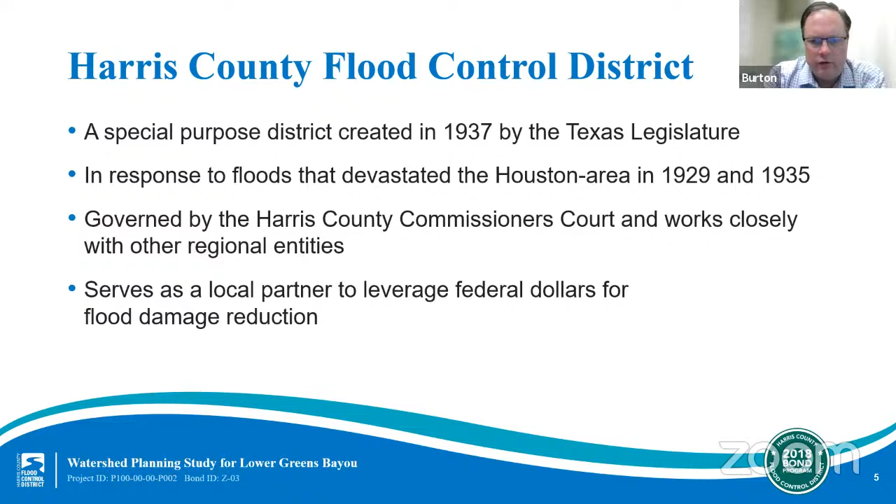The organization was created in part to serve as a local partner to leverage federal funding for flood damage reduction projects. Our mission has expanded since our founding, leading to billions of dollars in federal, state, and locally funded infrastructure projects in the ground. The mission of the Harris County Flood Control District is to provide flood damage reduction projects that work with appropriate regard for community and natural values.

One of the most difficult challenges we face is constructing effective projects that are sensitive to the community and natural values in a highly urbanized area.

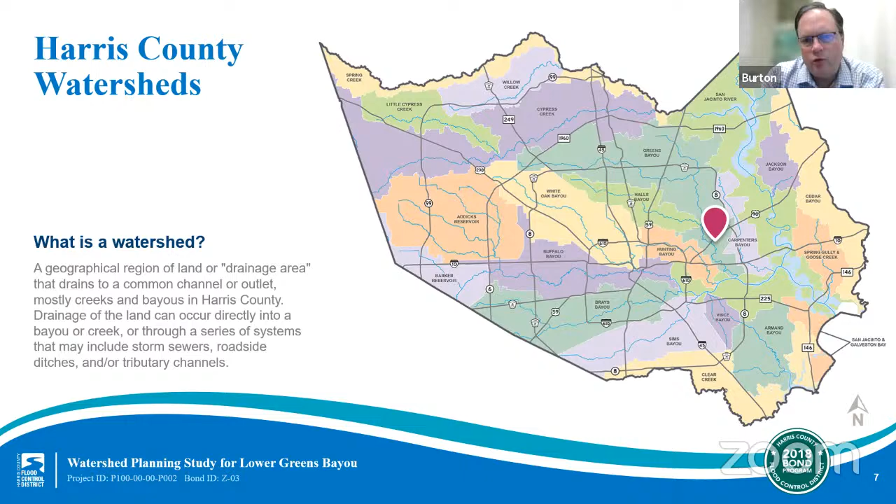Harris County includes 23 main watersheds totaling approximately 1,800 square miles with more than 2,500 miles of channel, roughly equivalent to the distance from New York to California. A watershed is a geographical region of land that drains to a common channel or outlet. Each watershed in Harris County has its own unique characteristics and needs. The project we are presenting tonight is in the Greens Bayou watershed, located in northeast Harris County.

Our area is naturally flood prone. Here are some of the reasons why. First, we are subject to extreme rainfall, often from tropical storms and hurricanes. Second, our landscape, as we all know, is very flat. And third, our native soils are heavy in clay, which impairs and limits their ability to soak up excess rainfall.

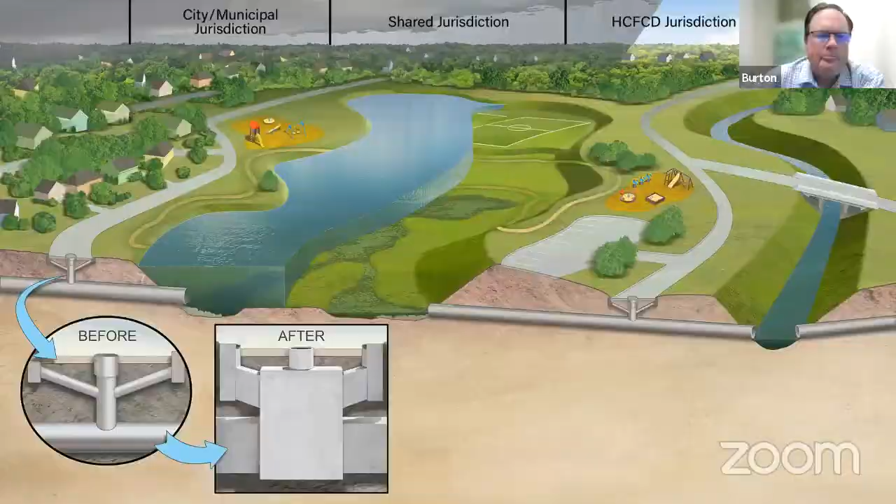On August 25, 2018, Harris County voters approved $2.5 billion in bonds for flood risk reduction projects. This vote followed a series of meetings across Harris County in each watershed, which resulted in a list of what is now 181 bond projects. As of August 25, 2021, every project included in the 2018 bond program has been initiated, including 11 projects in the Greens Bayou watershed.

A total of more than $1.35 billion in partnership funding has been secured so far to stretch the 2018 bond program even further. The actual timing of each individual project will depend on a variety of factors, including environmental permitting, right-of-way acquisition, and utility relocation, and in some cases, requirements of a particular grant. That said, project lists and projected schedules are updated regularly on our website.

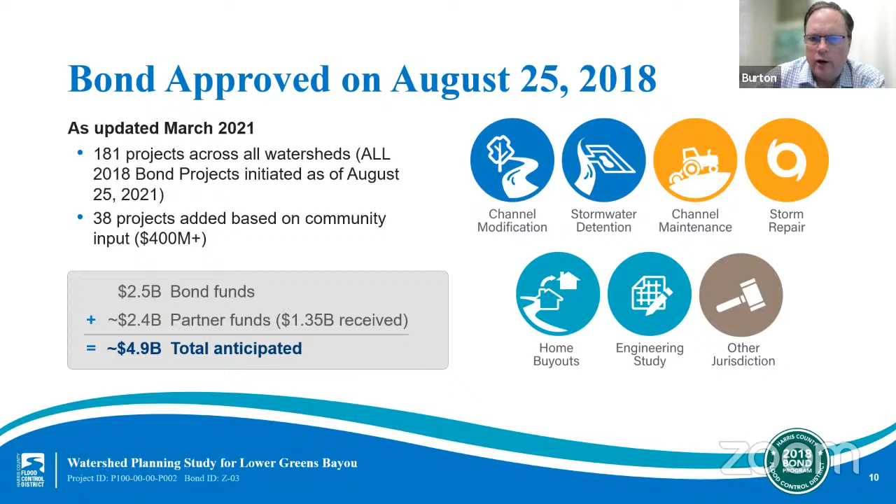While the bond was for $2.5 billion, the full cost of every project in the bond tables is almost $5 billion. So we made it clear from the outset that we would need funding partners to fully construct the projects in the bond program. And as I mentioned, we've had some success so far, having secured more than $1.35 billion in partner funds.

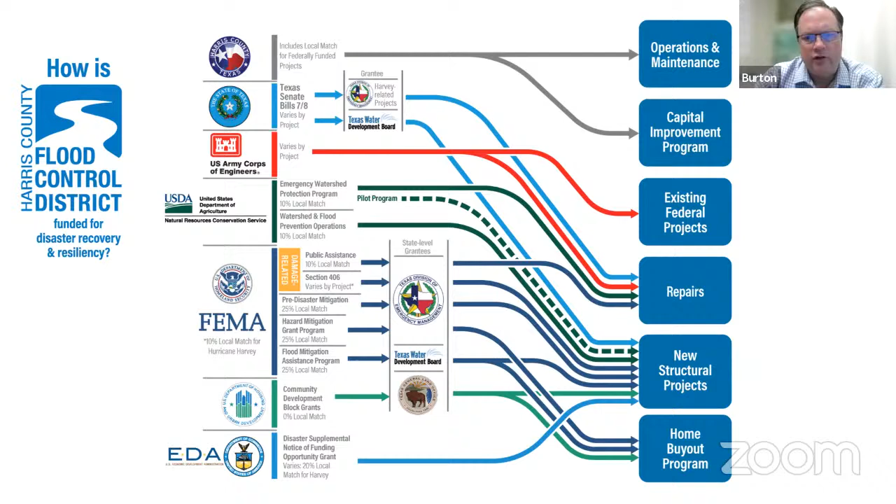As this graphic illustrates, there are many sources of partnership, including federal, state, and local funding that the Flood Control District is working to secure for Harris County. Each agency has its own definition of eligible projects and its own requirements for local match funding.

So the Flood Control District works diligently to match projects to the right partnership opportunities. Now that I've provided that background, I will move to the part of the program that is specific about the Greens Bayou watershed and the watershed planning study for Lower Greens Bayou.

Here we have a map of the entire Greens Bayou watershed. As I mentioned earlier, a watershed is defined as all of the area that contributes drainage to the main channel, which in this case is Greens Bayou. The upper reaches of Greens Bayou flow in an eastward direction, and then the lower reach flows south into the Houston Ship Channel. The watershed covers about 212 square miles, and there are about 308 miles of open streams, including the primary streams and tributary channels.

Flooding of homes and businesses along Greens Bayou and its tributaries has occurred numerous times in the last 30 years, with devastating flood levels throughout the watershed brought on by Tropical Storm Allison in 2001 and Hurricane Harvey in 2017.

Significant floodplains and high-density development have combined to cause high damages during even moderate flood events. This area was largely developed before our current understanding of flood mapping, meaning many structures were built within the current 100-year floodplain.

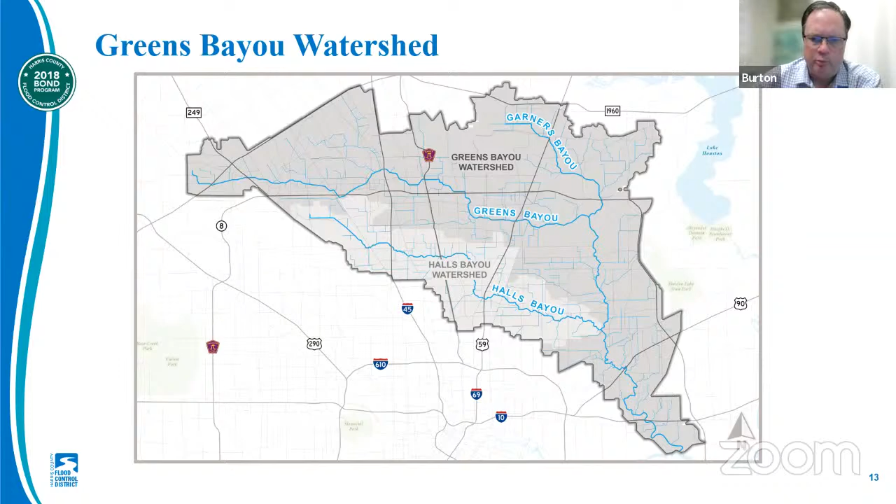Additionally, the lower 10 miles of the watershed, which is generally the portion downstream of US 90, are tidally influenced, meaning that water levels are also influenced by the elevation of water in the ship channel. As such, storm surges can impact flooding levels in this portion of our study area.

For the feasibility study, the final product is a report that summarizes the study and forwards recommendations around concepts that may need to move forward for additional consideration and refinement.

But we understand that many are not all that excited at the completion of just a study or report. However, this element is critical. There are limited dollars for flood risk reduction, and we want to be responsible stewards of taxpayer dollars. We want to ensure that we build the right projects and that we maximize the use of dollars spent. And we want to ensure that projects do not cause flooding somewhere else.

Additionally, the securing of funding assistance from others requires rigorous demonstration of project benefits and evaluation of environmental impacts. The feasibility study also informs the next steps, including the preliminary engineering process that will further refine the alternatives, including identifying needed rights of way, determining utility relocations, environmental permitting, and refined and detailed cost estimates.

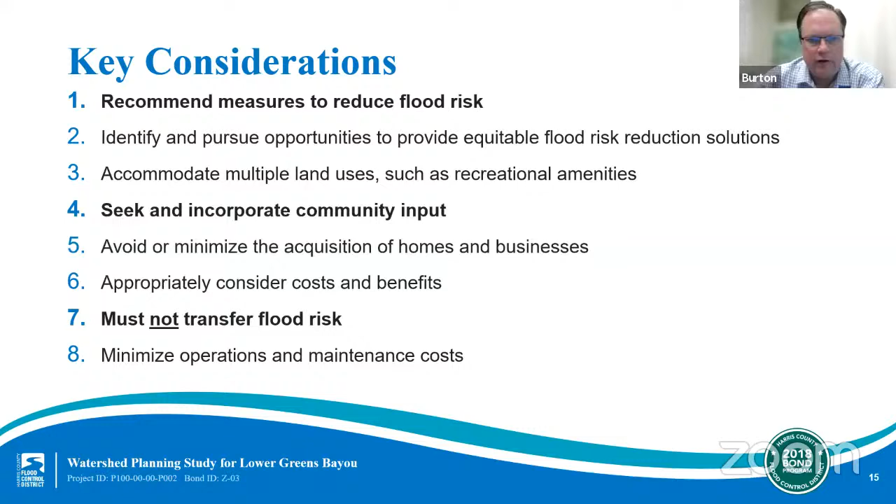You may have heard us talk about our flood mitigation toolbox. These are the various techniques we typically deploy to reduce flooding.

It is important to find the right type and right configuration for each project. Now I'll walk through them briefly to add some additional context.

First, channel modifications have long been used by the Flood Control District and other entities to reduce the risk of flooding. It's a broad category, from full rectification of a channel to providing some modification to the side slopes.

Stormwater detention, which I described earlier, is also a popular mitigation tool. The concept is simple: temporarily store floodwater to provide relief to the channels downstream. Stormwater detention is more cost-effective when the watershed is smaller. As the watershed gets larger, more storage volume is required to obtain the same benefit. That is why you will not typically see a stormwater detention basin along a large river, such as the San Jacinto River.

It is common to pair channel modifications in a reach with stormwater detention basins to mitigate increased flow. Less common tools include channel diversions and bridge adjustments. Diversions are only available when there is a location that you can divert the floodwater to that will not cause adverse impacts. Bridge adjustments and/or replacements can remove an impediment to flow, and they are also often implemented as part of a larger suite of initiatives.

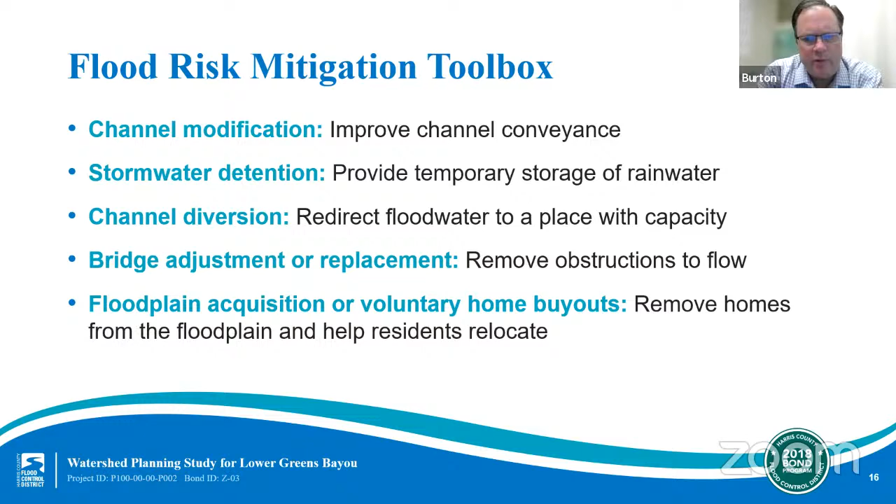A bridge replacement can also result in additional flow downstream, requiring it to be paired with a stormwater detention basin. Last is acquisition or buyouts in the floodplain, which is simply purchasing flood-prone properties and assisting the owners in relocating to a home on higher ground. It is not always the most popular option, but it is sometimes the best option, especially when there are safety hazards to residents and first responders.

There is no technical definition of Lower Greens Bayou. However, for this project, it is a portion of the Greens Bayou watershed downstream of this site. The study area includes the contributing watershed of Greens Bayou. Downstream of this point, there are a number of tributary channels that also drain to the bayou, and there are flooding issues along some of these channels as well. In total, the Lower Greens Bayou feasibility study area encompasses just over 42 square miles.

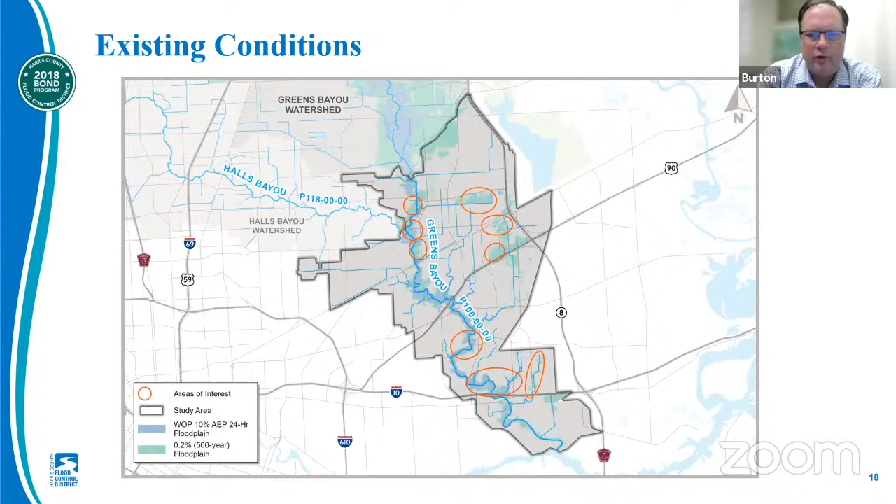These clusters help drive our formulation of potential flood mitigation concepts. And while we use this data as a baseline, we refine these areas in collaboration with the community to help us organize our approach.

Based on these areas of focus I just highlighted, you can see some overlap with locations of the flood risk mitigation concepts we explored during the study. All in all, we looked at 11 concepts in 10 locations to determine what projects or types of projects may be the most beneficial and feasible in the Lower Greens area. I'll talk more about the specific concepts we explored shortly.

While studying these flood risk mitigation concepts, we had to have an objective way to weigh the identified concepts against all other projects in Harris County. As projects are identified, they compete for funding, whether that's through local dollars or partnership dollars. Without an apples-to-apples comparison of key factors, it's difficult for us to make determinations about where to allocate funds and prioritize efforts.

So we use that same score criteria described earlier in our study. We score each mitigation concept on the 8 factors listed here. This then rolls up into a final score for each of them, which we use to better understand the potential project. I want to emphasize a couple of important aspects of this score.

First, it's important to note that these scores are not the end-all, be-all of this effort and are not the sole determinator for what comes out of this study. They are, however, an important element of decision-making, but not the only element.

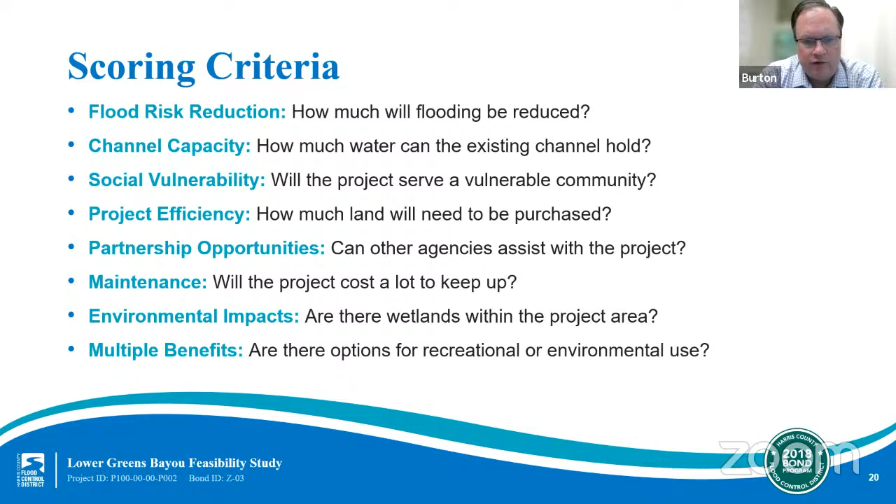I'm going to provide a general description of each of them. I'm also going to tell you what we like about each particular concept, and I'll call these the positives. And I'll also share maybe what we don't like about each, and I'll call these the challenges.

The first mitigation concept we'll discuss tonight involves additional stormwater storage in the existing flood control district stormwater detention basin, known as the Garrett Stormwater Detention Basin, or by its unit number, P500-01-00. This concept is located at the northern edge of our Lower Greens Bayou effort. You can see the general location on the map in the lower right-hand side of the screen.

This basin was constructed in the late 1980s by building a dam across the channel and a berm around much of the perimeter. It occupies considerable land but has never been excavated. So for this concept, we investigated the potential of excavating the land and, if necessary, modifying the control structure. From a pure engineering standpoint, this concept does provide the potential to reduce flood levels downstream.

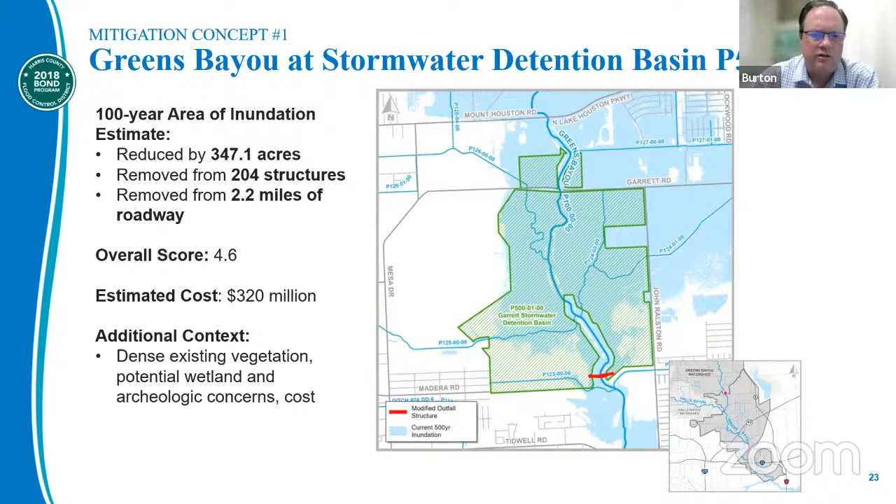The second mitigation concept is along a tributary channel that we call P122-00-00, which is near C.E. King Middle School, as well as the Sierra Ranch, Stonefield Terrace, and Parkway Forest subdivisions. The channel runs from east to west with a portion adjacent to Crenshaw Boulevard.

For this concept, we looked at enlarging the channel and constructing a stormwater detention basin. The positives of this project are that it benefits local neighborhood drainage, which is impaired in this area. It would reduce the floodplain to the north between the channel and Tidwell Road. Further, when this channel floods, it spills into the Humont subdivision to the south, and that would also be mitigated.

The project would work in concert with subdivision drainage improvement projects that the Harris County Engineering Department's Recovery and Resiliency Group are working on in the Sierra Park and Stonefield Terrace subdivisions. So the positive is that we can address flooding in multiple neighborhoods and leverage work being done by Harris County. The challenges include limited right-of-way along the channel.

We would either have to acquire land or construct an underground conduit to avoid displacements. We estimate this project with the channel conveyance improvements would cost almost $24 million. If we replace the channel and enlarge it with a conduit, the cost would be a little bit higher.

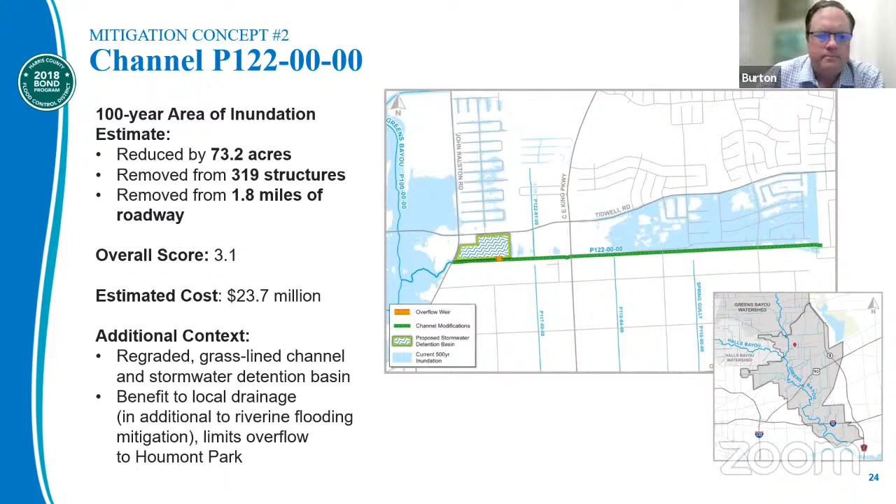Our third mitigation concept focuses on Brock Park, which is a large and mostly undeveloped park owned by the City of Houston. It sits at the confluence of Halls Bayou and Greens Bayou and includes an out-of-service golf course, forested areas, and a nature preserve. On the surface, it provides a great opportunity for detention.

That said, stormwater detention in the lower reaches of a large watershed can be incredibly challenging. As I discussed earlier, due to the larger flow rate, we have to provide substantially more detention volume to provide the same reduction in flood risk compared to areas further upstream. And there's another large hurdle.

Brock Park is owned by the City of Houston as a City of Houston park. Any projects we eventually construct on this site would have to align with the city's vision for the property and the park itself, and would be subject to the requirements of Texas Parks and Wildlife, Chapter 26.

All of that said, this mitigation concept is a bit different than others we'll discuss tonight, in that we know we may have about $10 million from the flood control bond to work with for this effort. With that in mind, we explored a concept that would fully utilize that $10 million in potential funding and maximize the potential volume.

Our analysis suggests that a substantially larger project would be required to make meaningful flood reductions along Greens Bayou, and that would be very difficult given the current function and limitations of Brock Park.

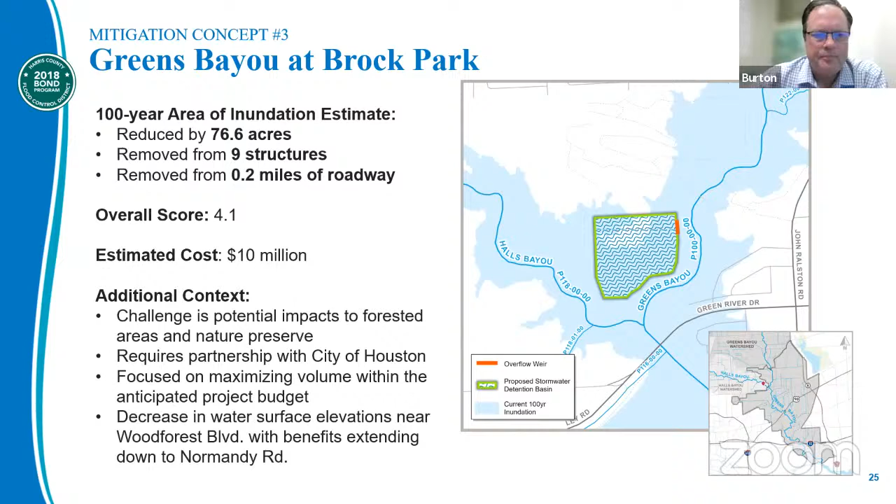Our next mitigation concept considers channel P107-00-00, which drains south from Beaumont Highway near the Sam Houston Tollway and then southeast towards Greens Bayou. This channel is also known as Big Gulch Bayou. We have identified capacity concerns in the main channel just downstream of Beaumont Highway. This area of interest includes Royalwood Elementary School, as well as the Royalwood and Beaumont Place subdivisions.

This concept considered adding capacity to the channel by constructing a box culvert system below the channel and constructing a stormwater detention basin to ensure flow rates are not increased downstream. On the positive, this would help the local drainage in the area, which is a concern, and address most of the inundation of homes. Further, it requires only limited right-of-way acquisition. The challenge is there is limited depth for constructing the stormwater detention basin, which means we would get less storage volume for each acre of land that we have to purchase. We estimate this project to cost $8 million.

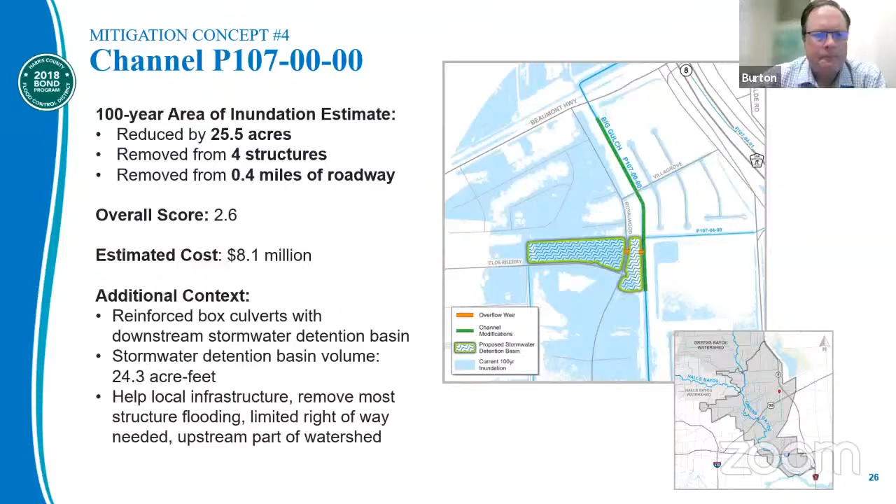The next concept considers improvements to Greens Bayou near Old US 90 or Beaumont Highway. This area is near the McCarty Road landfill, and includes the Nelson Estates and Ralston Acres subdivisions. The mitigation concept considers adjustments to both the railroad bridge and the highway bridge, along with the construction of a stormwater detention basin. The positives of this mitigation concept are that we could reduce flood levels without a major right-of-way acquisition or displacement of homes or businesses, although we would have to acquire land for the stormwater detention basin. The challenge with this concept is that the reductions are minimal and the number of structures benefited is very small. Further, we estimate this mitigation concept to cost almost $48 million.

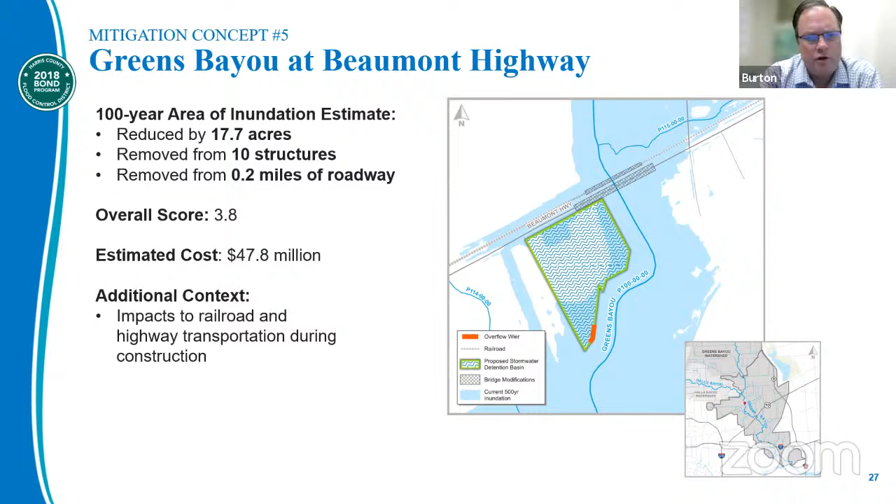The sixth mitigation concept is along Greens Bayou in the vicinity of Highway 90. This concept would benefit the Wynwood Gardens area. We were originally interested in this area because there is quite a bit of out-of-bank flooding in this portion of Greens Bayou, and we saw an opportunity to construct a high-flow diversion through undeveloped land. The project would also require construction of a detention basin. While it would be rather straightforward to construct, the benefit was less than we hoped, and it did not provide positive benefits to areas with homes that flood. The opportunity was that there is vacant land, but unfortunately the challenge is that it really only benefited areas where there's mostly vacant land. As we studied it further, the flow restriction we were trying to address was smaller than we first thought. For these reasons, we stopped studying this one completely and dropped it from further consideration. We did not even compute a cost, nor did we apply the metric.

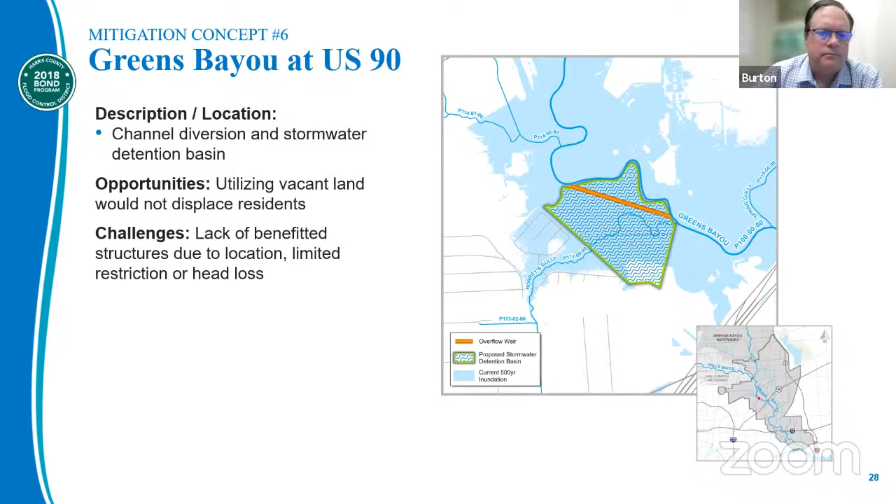The next mitigation concept looks at Greens Bayou near Woodforest Boulevard. This is a well-known identified area of interest, and the flood risk reduction area of interest includes Robinson Elementary School, as well as the Woodforest and Riviera East subdivisions. For this initial concept, we are proposing some minor channel conveyance improvements along Greens Bayou, coupled with minor bridge modifications and construction of a stormwater detention basin.

So what do I mean by minor? This is probably easiest described by explaining what it is not. It is not a massive enlargement of Greens Bayou, nor the construction of a large ditch. Instead, it involves some channel widening and excavation in the overbank areas, something we call benching. The work is above the ordinary high water and would increase the flood carrying capacity. Admittedly, this is less effective than major channel conveyance improvements. However, the minor channel improvements have less environmental impact and can be an aesthetic enhancement. The bridge modifications are necessary to accommodate the wider channel from the conveyance improvements, and the stormwater detention basin is necessary to ensure that we do not cause adverse impacts downstream.

The positive of this concept is that no homes or businesses are displaced, and it's not overly expensive. The challenge is that, frankly, it does not provide that much flood risk reduction. We could get more flood risk reduction by increasing the size of the channel widening. However, we would begin to impact the adjacent neighborhoods, and of course the cost would go up. We would also need additional stormwater detention, and there's not land readily available for that. We estimate that this concept would cost almost $7 million.

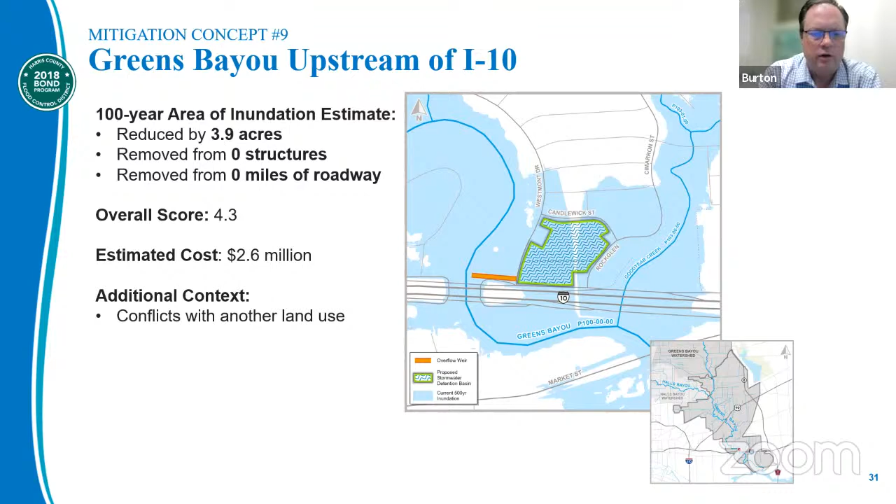The clear positive of this is that the Flood Control District already owns the land, so the cost and displacements are not an issue. The challenge is, unfortunately, that the stormwater detention basin will only address a small area and will only have marginal benefit to flooding. It is not nearly large enough considering its location within the watershed. We estimate that this project would cost $2.6 million.

The second to last concept we'll discuss tonight is along channel P103-00-00, which is also known as Goodyear Creek, a tributary channel that joins Greens Bayou just downstream of I-10. The area of interest includes Cimarron Elementary School and the Home Owned Estates and North Shore subdivisions.

And as with the earlier concept, this mitigation concept considers the former East Houston Medical Center property. The concept proposes the replacement of many culvert crossings along Goodyear Creek and the construction of a stormwater detention basin on the old medical center's property.

The positive of this concept is that it reduces flooding along the channel, and it provides a more beneficial use of the Flood Control District property acquired from the East Houston Medical Center. Additionally, it does not cost as much as most of the other concepts we have evaluated. The challenge is that while it addresses flooding from Goodyear Creek, most of the homes in this area are subject to inundation from the Greens Bayou main channel.

It would likely improve drainage during the more common smaller storm events, but not make much of an impact on larger flood events. We estimate that this mitigation concept would cost about $2.9 million.

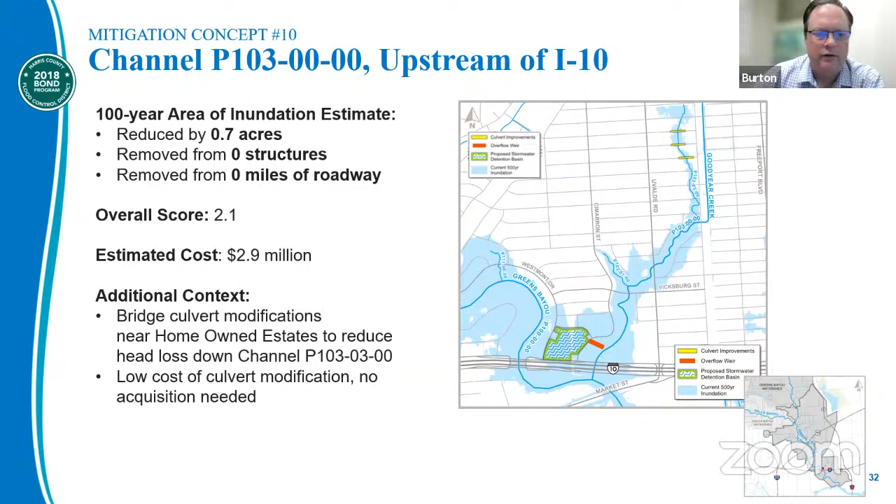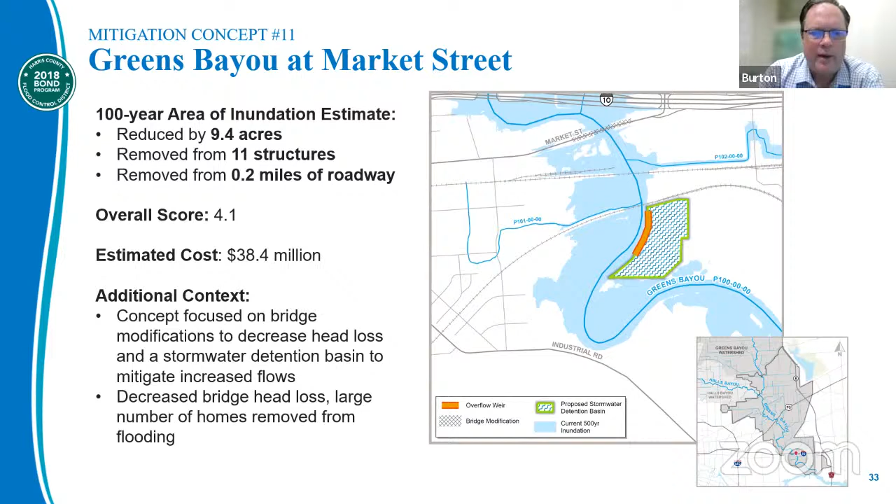Really, it's not an adjustment of the bridge at Market Street. The more we study it, we realize it was a replacement of the bridge at Market Street. But it would have benefited the areas around here, including these low-lying neighborhoods upstream of I-10. The challenge is the high cost of replacing such a large bridge. We estimate the cost of this project to be about $38 million. Further, it would require extensive coordination with the city of Houston, who owns the bridge, and we would have to address the management of traffic during construction.

All right, take a deep breath here.

So before I wrap up, I wanted to return to the project life cycle. As I mentioned earlier, we are in the early days for all of these concepts. Each of them will need to be weighed against other concepts across the county. Without this study, we wouldn't have any concepts to weigh into those conversations. So this is a critical first step in moving projects forward in the area.

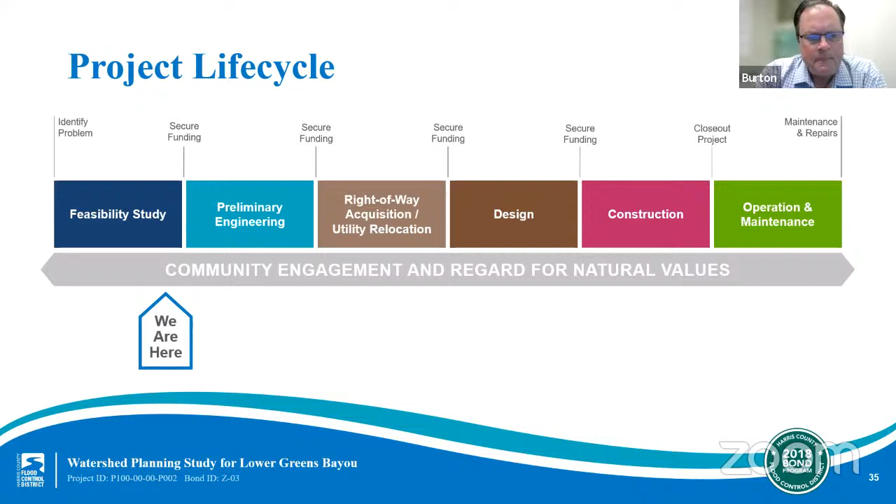And I will now turn the program back over to Robert to kick off our question and answer.

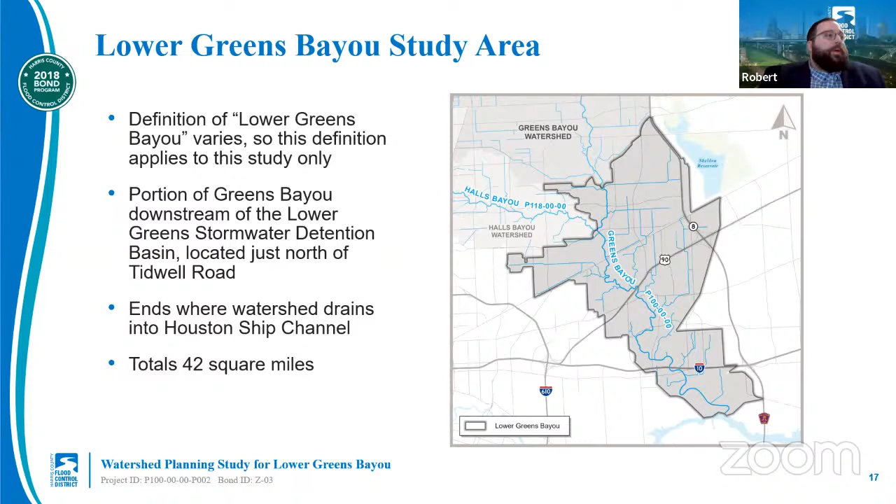One of the things we may have confused a little bit in the presentation is we've used the word study and project interchangeably. Technically, within our own vernacular, the study is a project. But when you talk about the project life cycle we showed previously, we're really looking at a suite of projects. The 11 mitigation concepts we showed earlier can each grow up and become their own project, and each has its own unique and local benefits and costs.

Each of these attempted to reduce flood risk either along the main channel or along some tributary channel. Some of those projects on the lateral channels were quite effective at addressing flood risk. When we get to the main channel of Greens Bayou, it's a huge challenge. There's a lot of water coming down there, and finding a way to manage all that water and come up with major reductions in flood risk is frankly quite difficult to do. We have yet to identify a plan that totally erases flooding. So each of these main stem projects provide slight benefits, but none of them really change the larger character of flood risk.

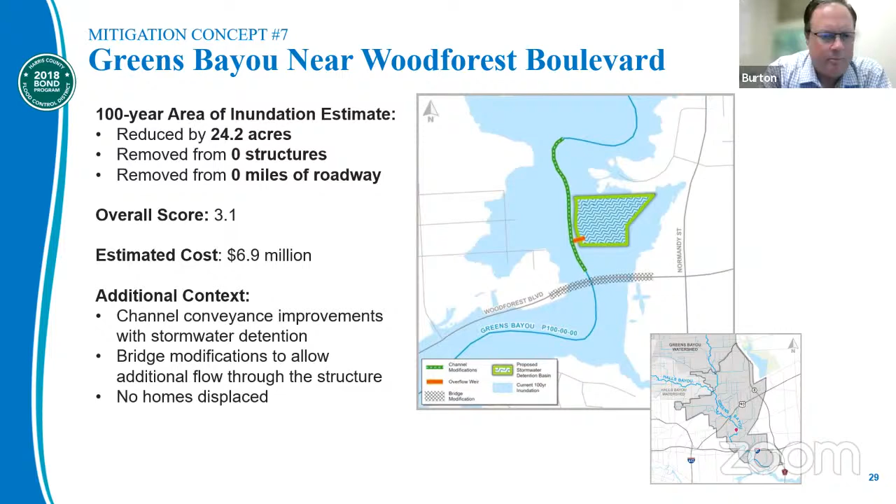That stuff comes out wet, you can't just put it in trucks. You have to set it somewhere. Where are you going to set it? It's not going to smell good. You have to have land to do it. You probably can't put it in the floodplain. Those are all challenges. And if you haul it down on a barge into the ship channel, you now have to get into all the environmental issues associated with dredge disposal that the ship channel and the port does.

So there are issues to work out, and they're not small. We have to move it forward in the project life cycle to even start to answer that question. There are some issues to deal with before we can even do that, so it's uncertain.

I'd like to add to what you touched on earlier in the presentation. We did do an assessment of the channel and brought on a fluvial geomorphologist to help us look at the overall condition and stability of the channel. They had favorable feedback for us on Lower Greens Bayou, and we're seeing the channel behaving as you would expect. Some areas show silt eroding out, while other areas are depositing, which is a normal function of a channel system.

There are times you can go in and do maintenance projects on it. Just upstream of this one, we have quite a few maintenance projects where we'll be going in and doing some of that silt removal.

However, on a project like Lower Greens, if we look at doing one of these dredge projects, we're talking about a significant project. It's not really going to be a one and done project. In a channel system where you'd expect to see a lot of silt come through, that channel is going to want to keep depositing silt and build back up to what it would consider an equilibrium point. So that's something that would be a consistent struggle to address in the future, and that does need to be considered.

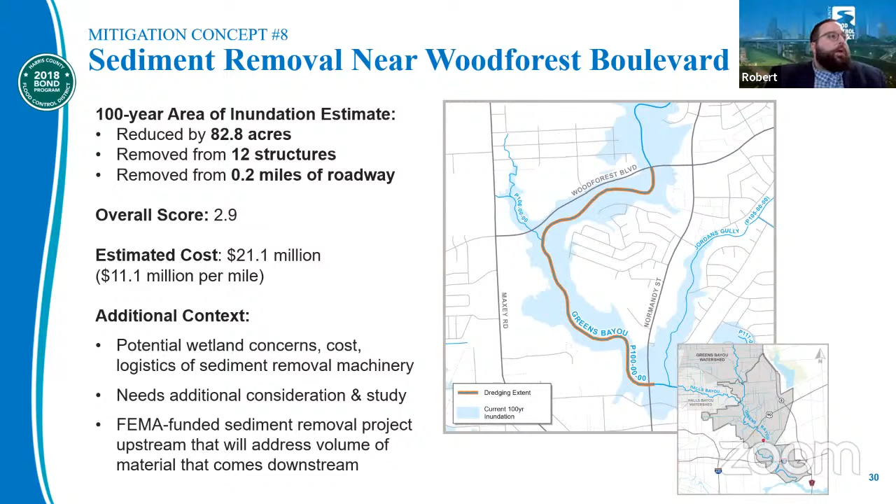Thank you, Dina. Looks like the next question is also for you: how long will it take to construct this project? Excuse me, the allergies are getting me tonight.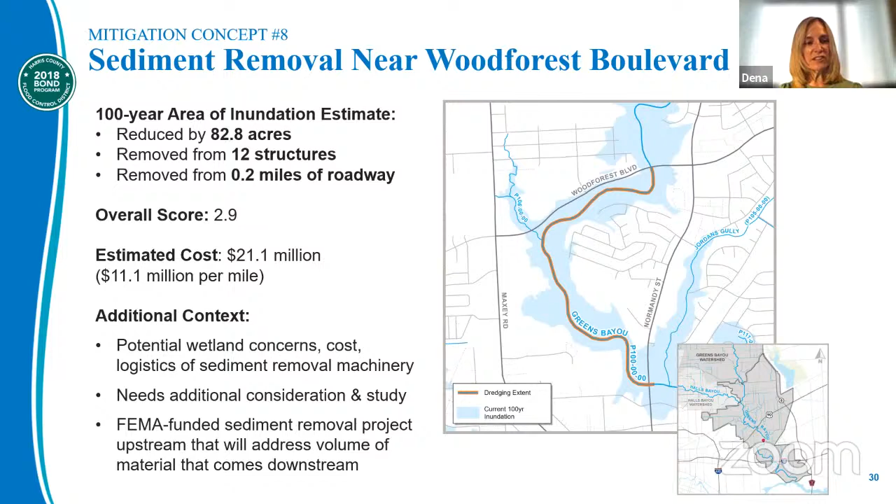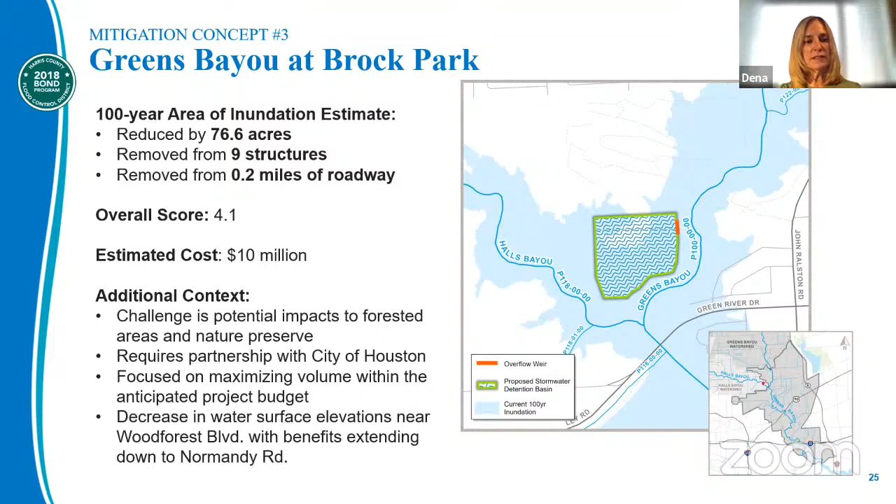The projects we've identified tonight, one was included in the 2018 bond program, that project at Brock Park, which will need quite a bit more coordination with the City of Houston before we understand if that's a feasible project. The others we've identified tonight will have documented recommendations for further evaluation, and we'll consider these as we build a future capital improvement program. We don't have specific funding set aside for these projects tonight, but this will be important information as we look to the future and develop that capital improvement program, understanding what types of projects we need across the county and the funding required for those.

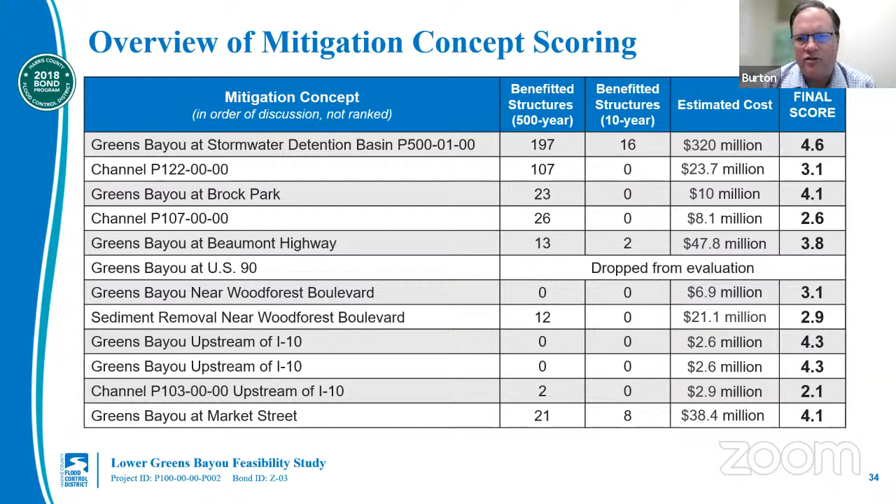We're pretty sensitive on how we build projects to try to mitigate and be respectful of the neighborhoods. So depending on what the project is, obviously we're not going to be making loud noises in the middle of the night. We try to do things during hours that are fair.

We try to communicate with the neighborhood, let everybody know what's up, how it's working, take suggestions. We're very careful about the ingress and egress of equipment. One of the big issues, if we're excavating a lot of dirt, which quite often we are,

is the truck routes and things like that. So those are all things that we try to work through with the community. But construction is not invisible and it's not silent always.

So it can be a challenge. I think we do a good job working with our neighbors on that. We get complaints sometimes, but not that many, quite frankly.